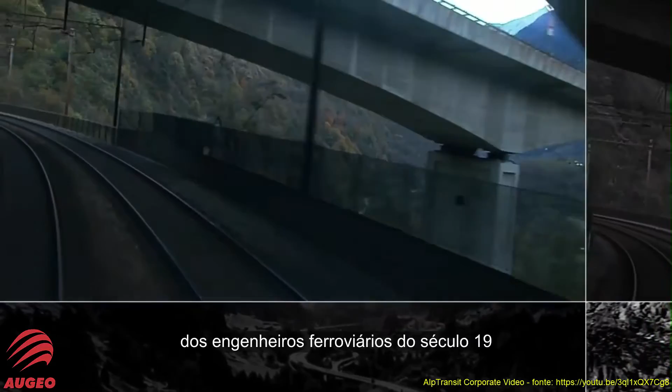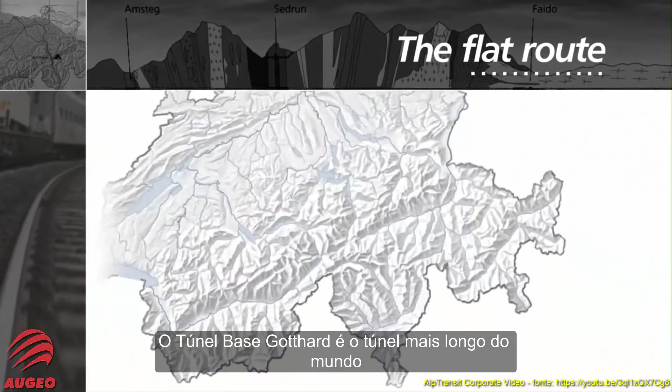But for the railway through the Gotthard, a new era will soon begin. In the future, trains will travel beneath the Alpine Massif on a route with minimal gradients and generous wide radius curves. The Gotthard Base Tunnel is the world's longest tunnel. Together with the Ceneri Base Tunnel, it will make the flat route through Switzerland reality and a component of the European high-speed network.

Passenger trains traveling at up to 250 kilometers an hour will shorten the journey time between Zurich and Milan to less than 3 hours.

1992: the Swiss people say yes to the new rail link through the Alps, or NRLA for short. That means yes to transferring goods traffic from the roads to the railways, yes to a flat route under the Alps, and a clear commitment to a modern, forward-looking transport policy.

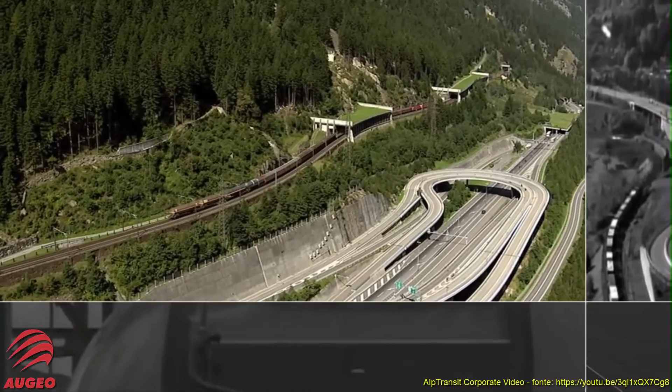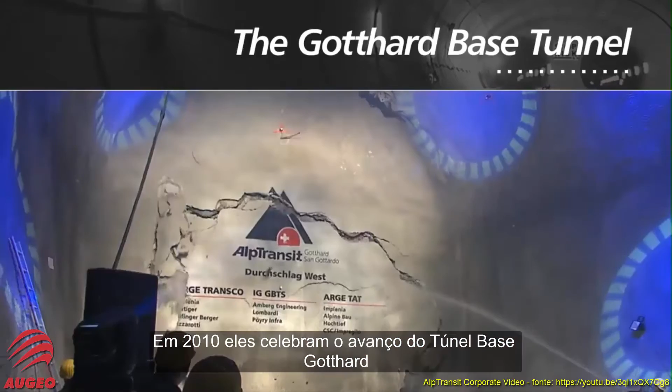For 11 years, the tunnelers bored and blasted two 57-kilometer-long tubes through the mountains. In 2010, they celebrate the breakthrough of the Gotthard Base Tunnel, a big day for Switzerland and Europe.

It's now the turn of the railway infrastructure specialists to work round the clock on the Gotthard Base Tunnel, equipping the tubes with state-of-the-art railway systems. The gigantic construction project will soon be complete.

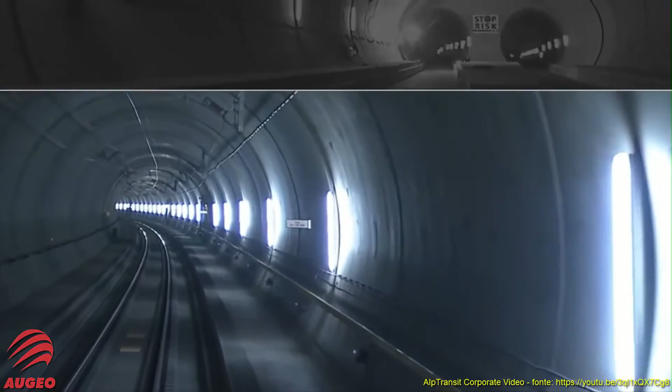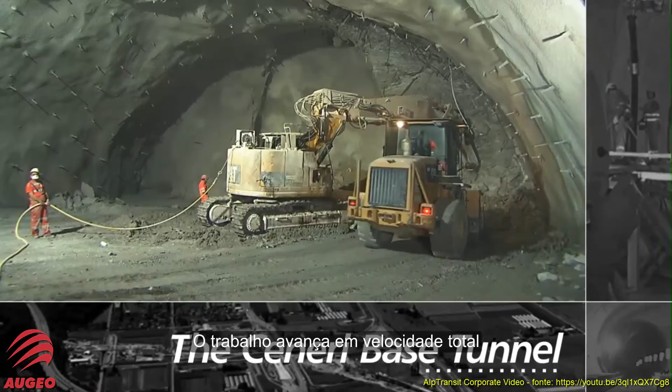Farther south between Bellinzona and Lugano, the second section of the flat route is taking shape: the Ceneri Base Tunnel, 16 kilometers long, the second major construction project of the NRLA on the Gotthard route. The work is proceeding at full speed. The first trains will travel through here in 2019.

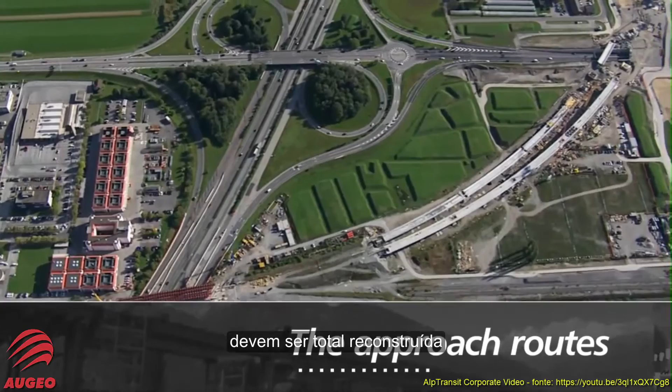The tunnels cannot operate without approach routes. In some places, virtually the entire traffic infrastructure of roads and railways must be completely rebuilt: bridges, underpasses, roundabouts, roads and embankments. Only by doing so can the tunnels be integrated into the railway network.

The headquarters of AlpTransit Gotthard Ltd in Lucerne. Everything comes together here. As the construction principal, AlpTransit Gotthard Ltd controls and supervises the construction, costs, standards and deadlines of the Gotthard and Ceneri base tunnels.

The new rail link through the Alps is truly the heart of Switzerland's forward-looking transport policy. And with the Gotthard Base Tunnel, the world's longest railway tunnel is being constructed, so we're building a world record.

The new rail link through the Alps is Switzerland's biggest ever environmental protection project, not only because of transferring traffic from road to rail, but also because we're attempting to give something back to nature, for example by creating new habitats for plants and animals, or returning streams and rivers to nature.

When trains start to travel through the Gotthard and Ceneri base tunnels, a new era of transalpine transport will begin. We're building the future.

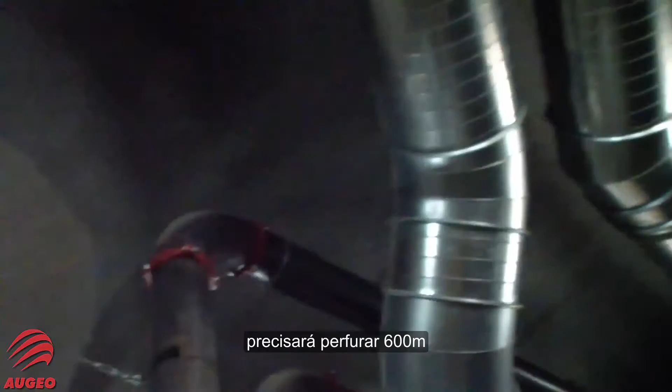If you start drilling a hole vertically upwards here, you would need to drill for 600 meters before you could see daylight again. In the deepest place, you would need 2,500 meters to drill upwards to see daylight again.

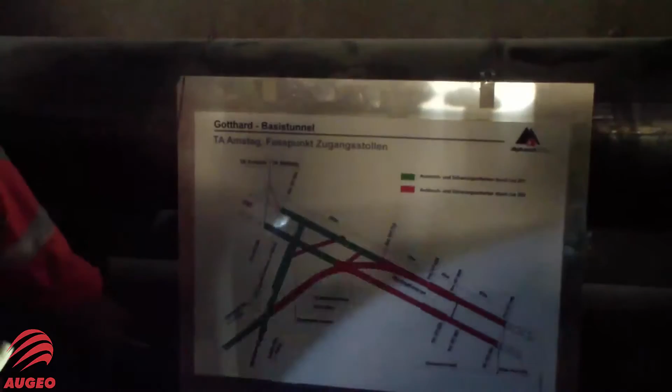Okay, right now we are here. This is the auxiliary tunnel where the energy comes in, that I explained before. This is the way we drove in.

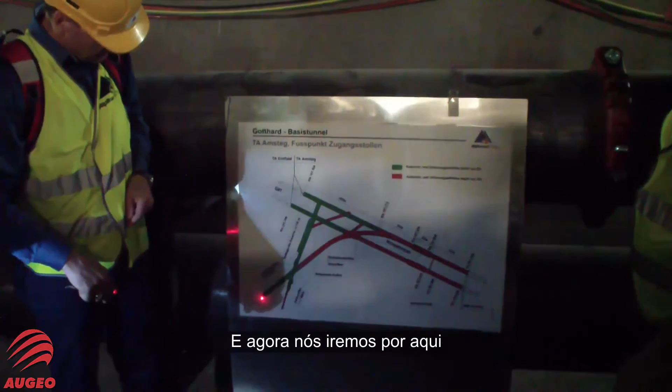What we do now is we go into the west tunnel, go back here and look at the safety installations, then come back to here, and we pass this rail infrastructure building that you can see here, which is located here.

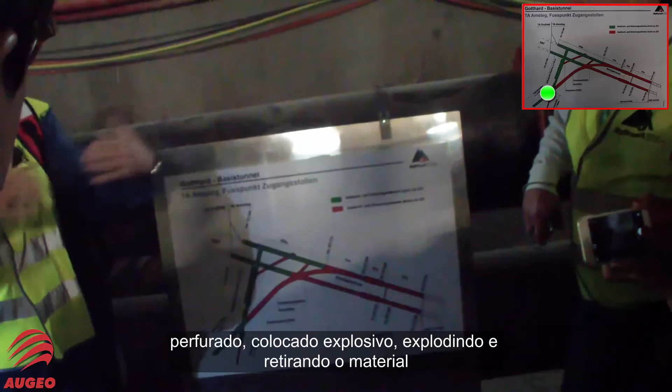Every meter of tunnel that we're going to see has been blasted out. Drill, explosive, blast, take out the material. In these locations, 45 meters long, the tunnel boring machines were assembled.

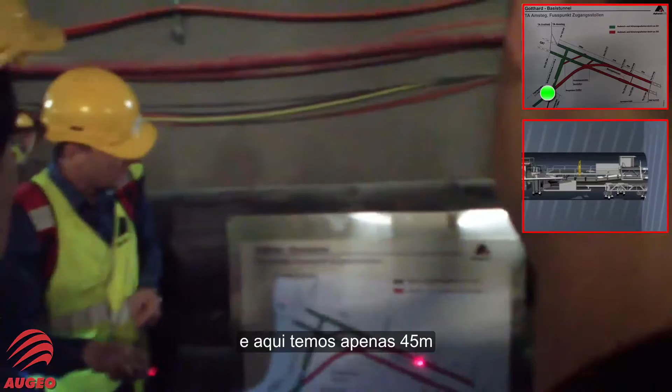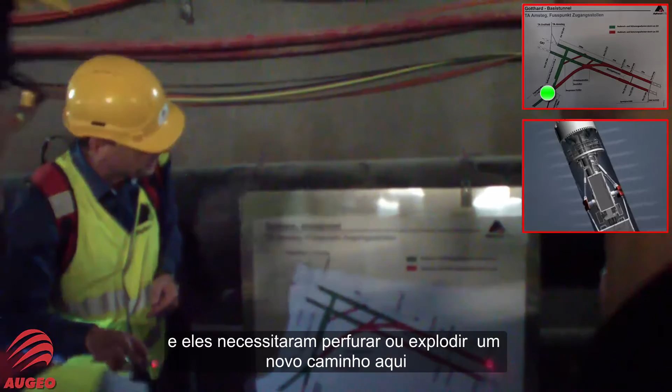As you remember from the PowerPoint before, the boring machine is 400 odd meters long, and this is only 45 meters. So they had to drill another hole or blast through another length here, and starting at the white point here, the tunnel boring machine was in operation.

You remember that it moves in, then it spreads out and presses the drill head in front of it. Starting from the white point, the tunnel boring machine did the job. Everything that we will see has been blasted out conventionally.

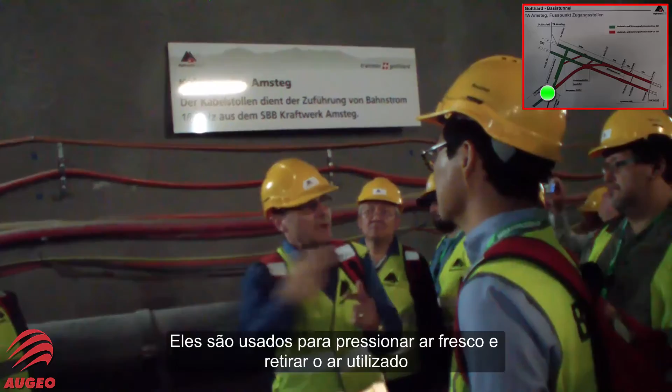You can see these two big tubes on the top of the tunnel. They were used when they blasted out the tunnel to press in fresh air and suck out the used air. When they blasted, they moved up to 130 cubic meters of air.

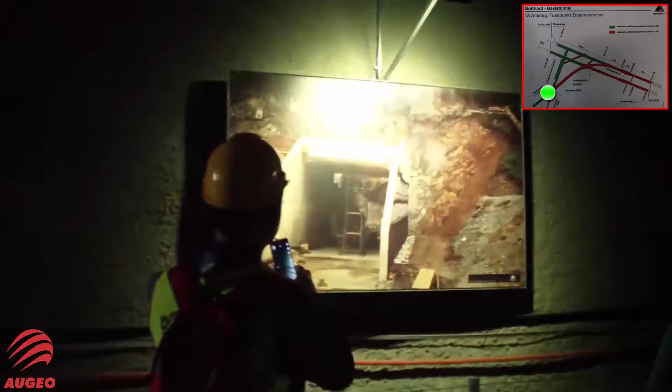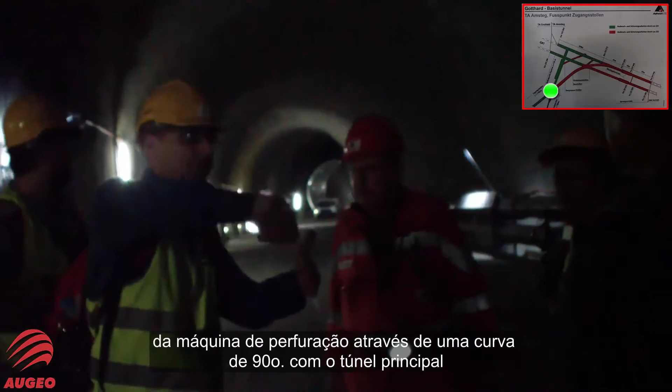The bit of tunnel we are in at the moment was used to construct, to assemble all the utilities, the machinery, everything that was used in order to drill and blast out the tunnel. And it is curved because you cannot bring all the equipment like a 440 meter long boring machine to one point and have a 90-degree angle into the main tunnel.

So you have to curve in order to get it. This is where we entered with the bus. First blast, November 1999.

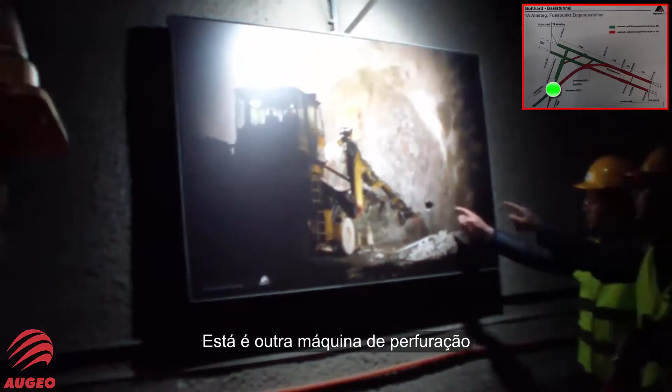This is another drill machine. In order to blast out the radius of the tunnel needed, we need about 150 to 160 holes each, 3 to 4 meters deep, which are filled with explosives in order to blast off between 3 and 4 meters.

So drilling the holes, filling them with explosives, blasting away takes 8 hours - that's 3 blasts, so 8 hours. In drilling the holes, filling them and blasting takes about 8 hours. So every 8 hours between 3 and 4 meters of tunnel come out, 24/7 gives you 10 to 12 meters every day.

8 hours for one. One of these holes is 45 millimeters in diameter, and is between 3 and 4 meters long.

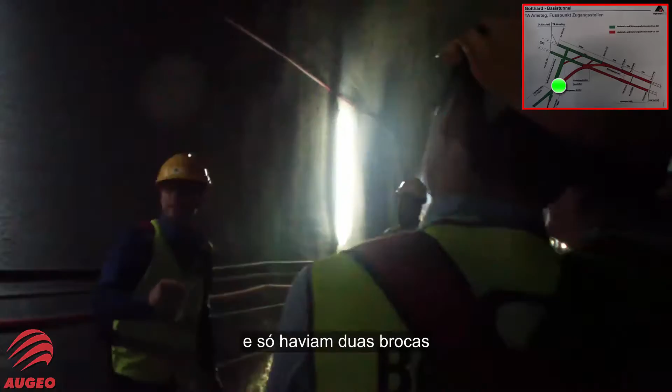How long do you reckon it takes to drill it? It takes 90 seconds to drill one hole, 90 seconds. You only have 2 drill heads. So it goes forward.

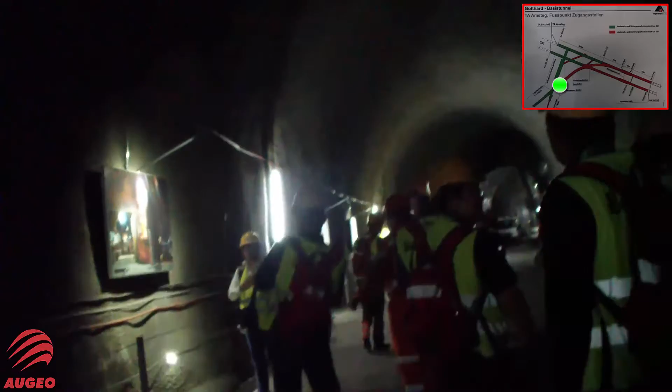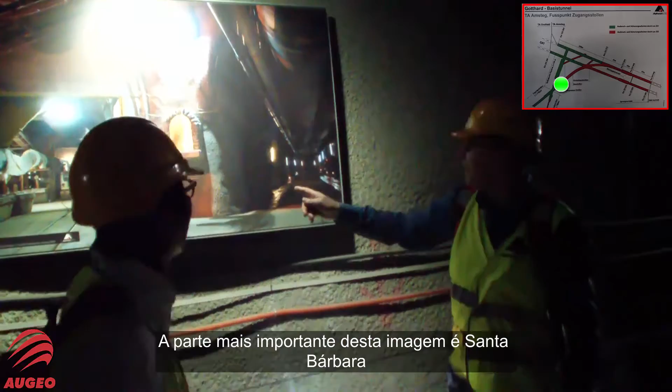This is the Holy Barbara, protector of the miners. The most important part in this picture is the Holy Barbara, the protector of all tunnel diggers.

Remember, it doesn't look like this anymore. It's already been reconstructed, renaturized. We entered here, and it was only a small work area. It was much larger before.

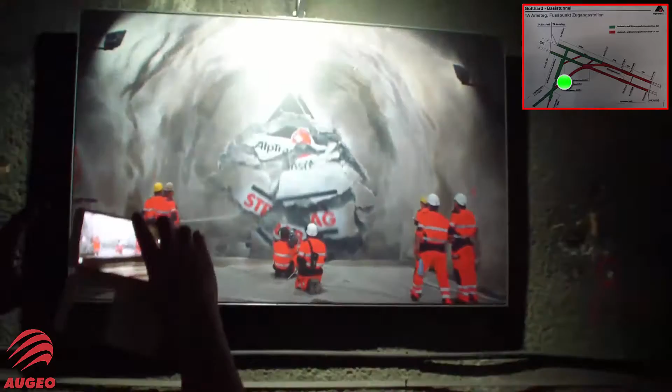This is one of a total of 6 breakthroughs. They had built it in segments. In total, there were 6 breakthroughs. The maximum distance when they drilled from either side, the maximum distance they were away, was 13 centimeters.

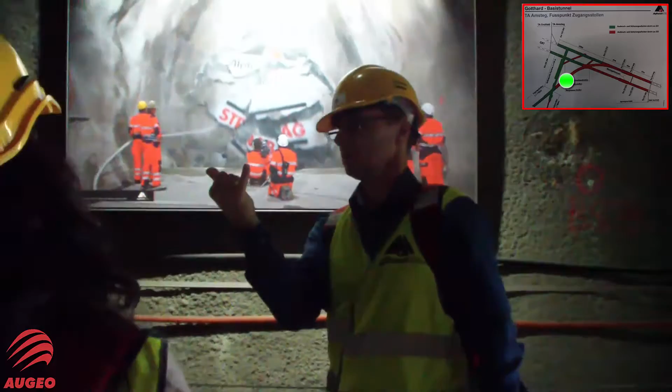Wow, this much. How can he measure?

GPS and laser positioning. But they bring it in from outside - it's GPS outside and then laser positioning.

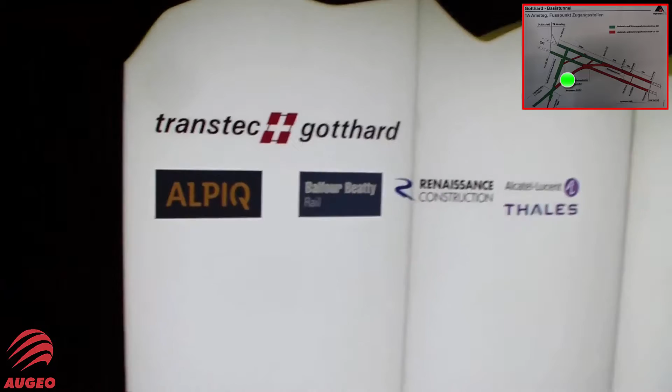So the surveying, no GPS, only outside. Just that. And inside, completely conventional, with the gyro theodolite. Also good, they are also above. Computer, but conventional. So the GPS was only outside for the position, and inside was conventionally done for the construction site.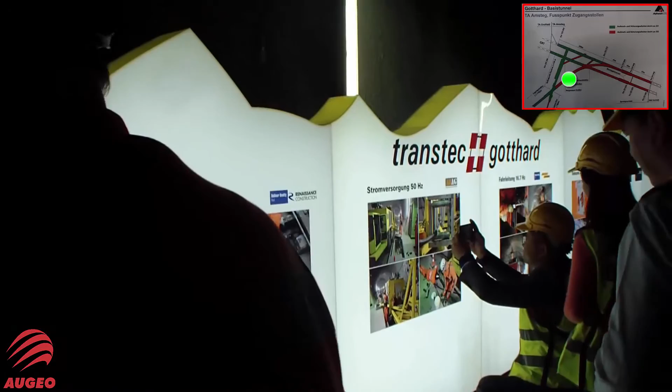And some clever brains.

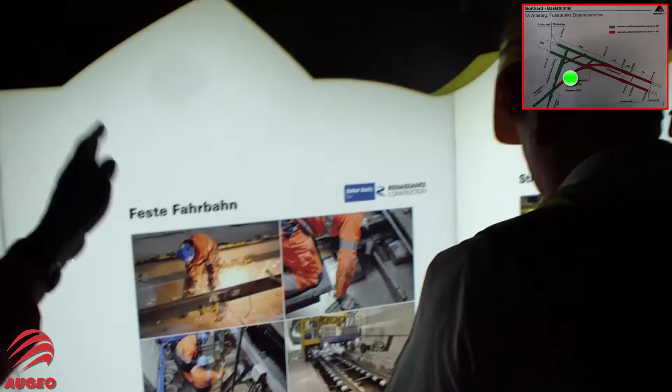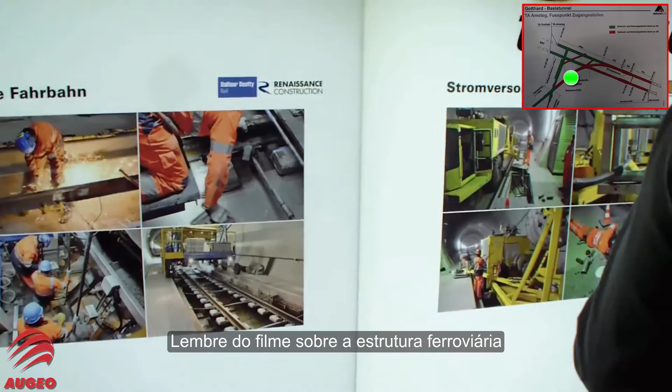So remember the movie when they bring in the railway infrastructure - railway, power at 50 hertz for all the installations, power, 16.7 hertz for the engines, and telecommunication and safety installation.

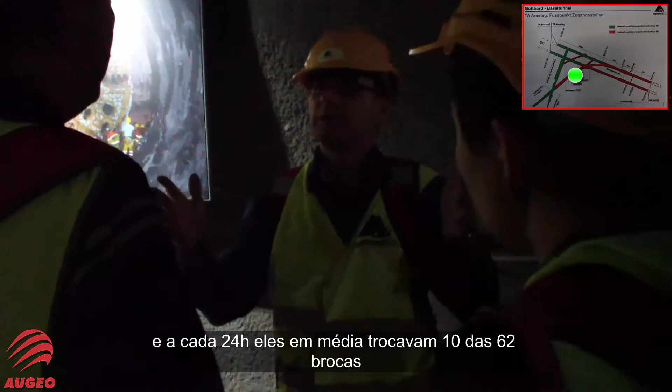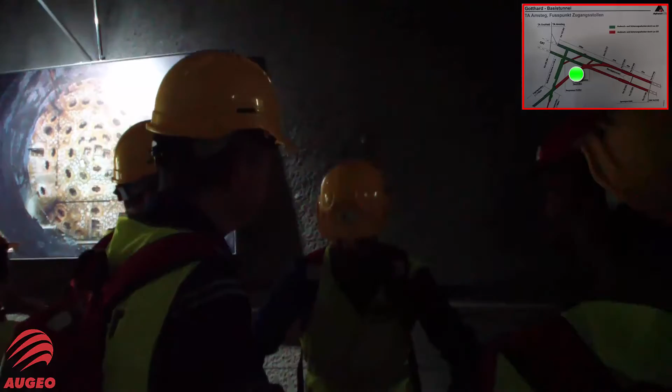They were hardened steel, like a wheel of this size. We have seen one, and when we entered the building where we watched the presentation, there is one of these great things. It's about this size. It's one of 62.

Ein Bohrmaß von 148 Kilo und das letzte Versetzen muss von Hand erfolgen. This thing is 148 kilos heavy, and you can imagine bringing it into this very narrow space - the last bit you had to do by hand. So it's a laborious job. Heavy duty.

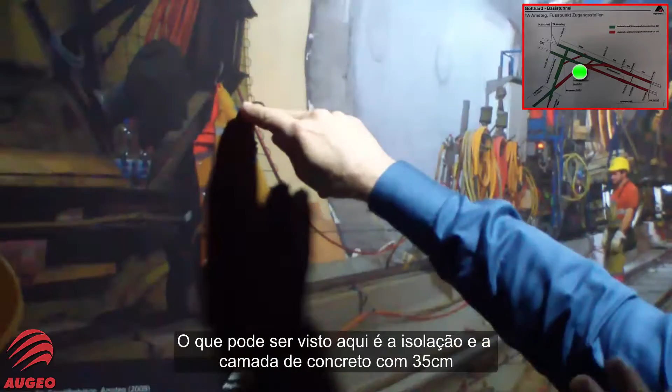Sehr spannend, ja. In 30, 35 cm Betonschale. So what you can see here is this isolation layer, hermetic seal, the 35 centimeters of concrete, and the cast. So this whole thing - you can see here the rail on the foundation where this whole thing moves, 20 meters each segment.

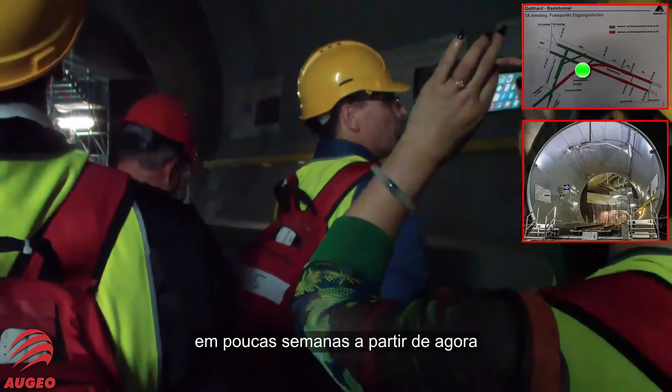This is a sample of the real tunnel. Only difference: the real thing - this is made of steel, and the real one is made of concrete. We are lucky. In a few weeks from now, we cannot go and see the real thing anymore. We can only see this, because the real thing will then be in operation. Yeah, that's why we come.

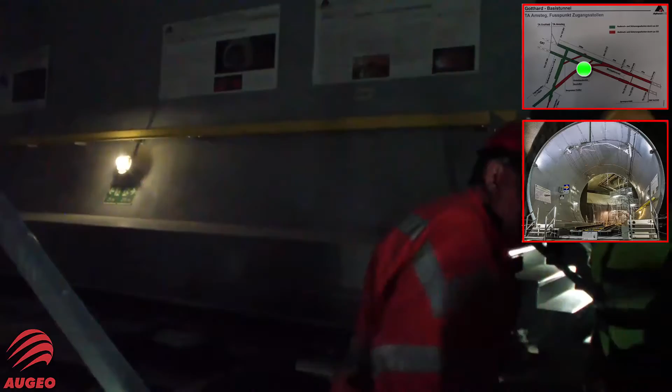For future maintenance, each and every one of these foundation blocks is in a rubber box, so it's isolated from the concrete which is poured into the whole bed. So whenever maintenance is needed, you can lift the rail out, make repairs, and put it back in.

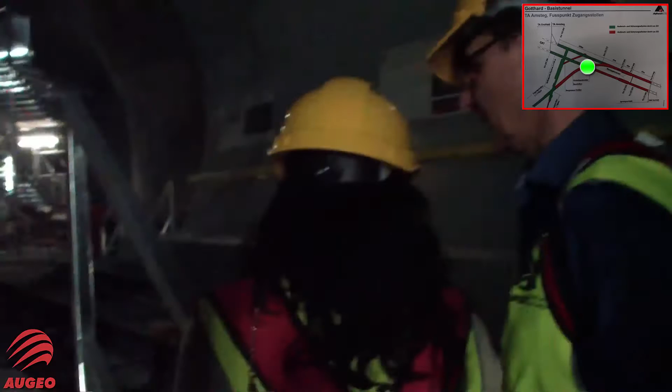What you see beneath you is the real tunnel. Now, in order to make this, they had to cover the tunnel on this short segment here. Again, when you have a train at 220 kilometers per hour which is pushing air in front of it, you cannot let the air out in such an open space. That's why they had to cover the tunnel. It's the only moment, or the only bit of tunnel, you can actually see from above, on the north side.

Now we go downstairs, we sit down and watch a movie, and please, everybody of you has a water bottle - please keep drinking water.

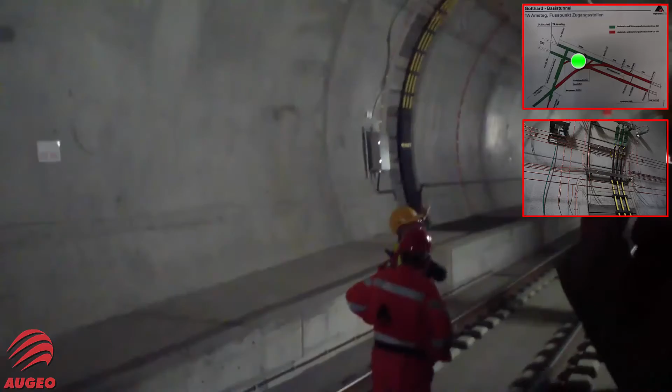This construction here that you see on the left side, in order to restart, consumes a lot more energy. Therefore, we have these power amplifiers, and these four auxiliary wires here see to it that enough energy is available in the main wire, and the two wires below are earthing, grounding, because you don't want any issues. We talk 15,000 volts, and that's quite a bit.

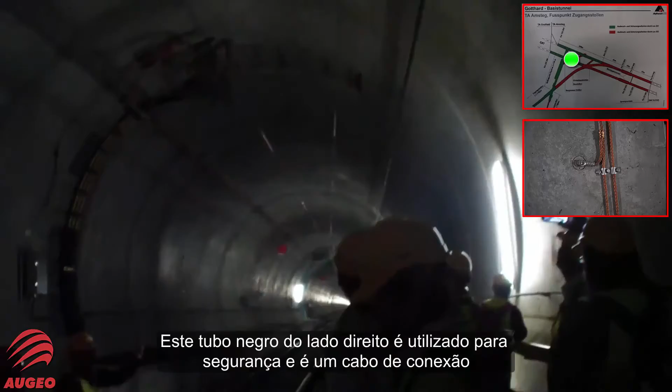Yeah, don't signal - this black tube on the right side is the life wire of the whole tunnel. It's a leaky cable through which all communication between the train and the infrastructure is transported. It's a leaky cable, GSM-R or red, and it will allow us in the future to use our iPhones when we drive.

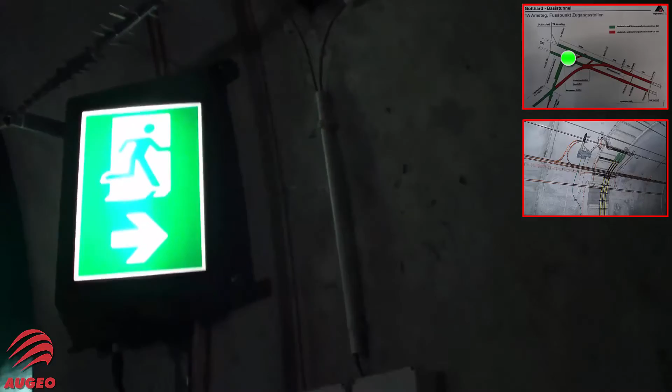Most important safety element of the whole tunnel is the handrail. The handrail is uninterrupted except when there is a door. So even if you can't see anything, you follow the handrail in any direction until the handrail stops, and then you are out.